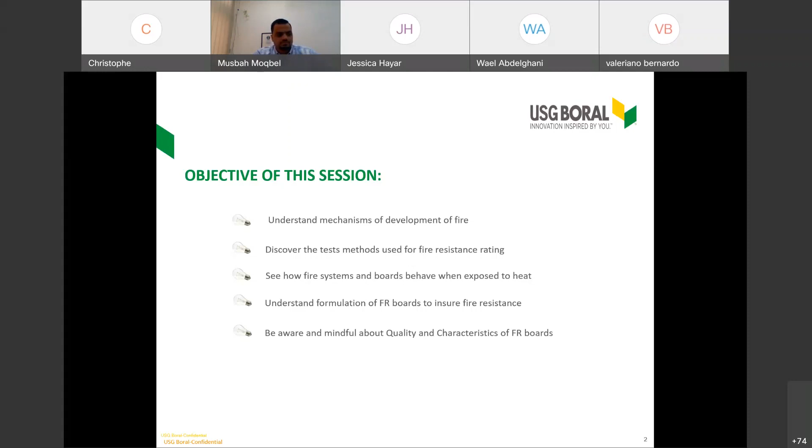There is a specificity of fire-rated systems and fire-rated performance of plasterboards. Ideally, we wish for our customer and for the project that this performance would never be needed. The fire safety and passive fire safety offered by our systems is required in events of disaster or fully developed fire within buildings, which is obviously primarily to be avoided. But in case of such occurrence, the fireboards and systems of USG Boral are here to save lives and to save properties.

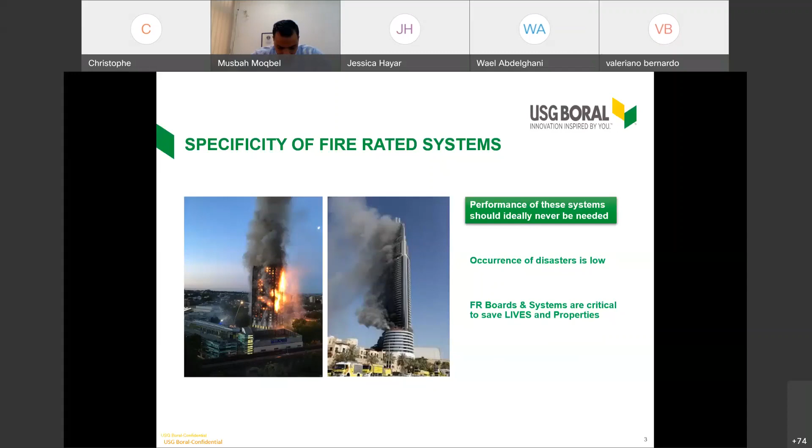We sometimes think that fires in buildings are scattered events, but they happen periodically, a little bit everywhere in the world. You might have seen that one or two days ago there was a big facade and building fire in Milano. So in any regions of the world, including regulated ones, there are sadly events that recall us that fire is not just pure imagination. There are periodic fatalities leading to loss of buildings and loss of exploitations.

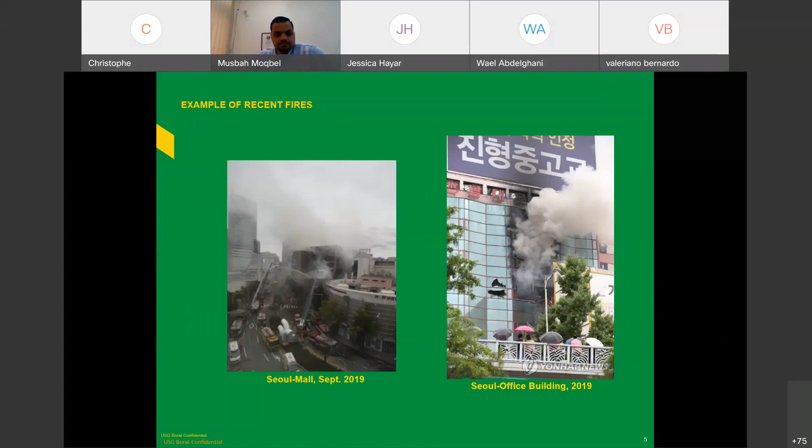Musbah, can you still hear me? Yes. Okay, I had a signal that I was muted. This shows these are not scattered events, this happens. I'm showcasing here some events that occur in Asia as an example, but any of the countries have sadly had the opportunity to demonstrate such fatal events, and in some cases bringing loss of life.

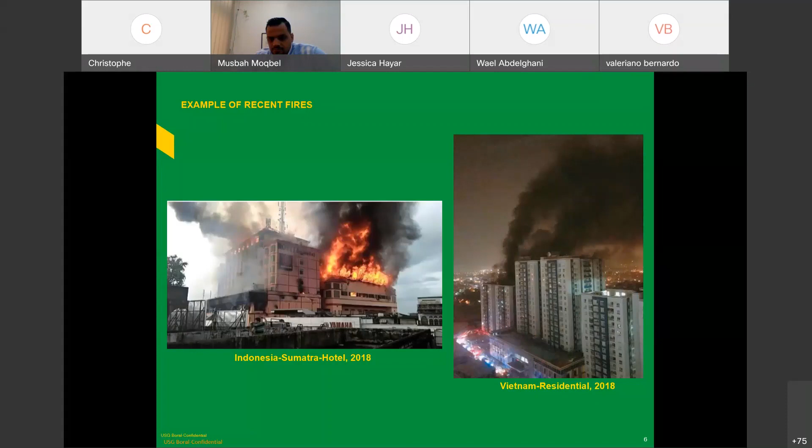As an introduction to the dynamic of fire, and how a fire starts and spreads until becoming a fully developed fire, I will soon show you a brief video to introduce the stages of fire development. But how does it start?

It needs three components: something to burn, a combustible product; some energy; and a comburant, which is oxygen. It usually starts with furniture, mattress, foam, or any combustible product that initiates the fire, which at first, in the first seconds or minutes, can be mastered or extinguished. But there are also design and ventilation conditions which can lead this fire to spread in the room, and in some extreme cases spread out of the room.

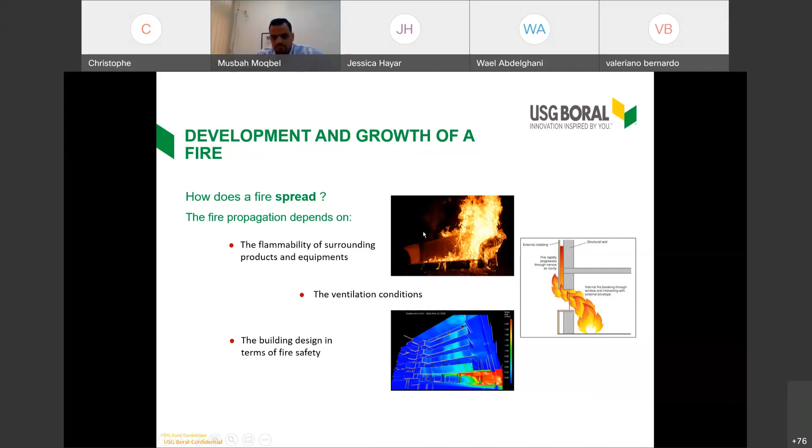With regard to this mechanism and these steps, I'd like to get back to this. In terms of stages of fire development, there is ignition, which at this stage can be mastered through an extinguisher if there's opportunity for a quick reaction. Then, depending on ventilation conditions and presence of more or less combustible products or furniture in the rooms, there is fire growth, which in extreme cases can lead to what is named flashover, or fully developed fire within the rooms, where flames can get out from the original room to spread to another room, adjacent corridors, or in some cases adjacent floors. Let me guide you through a video that will allow you to visualize these stages of fire.

Before this video, I want to mention that between the stage of ignition, the start of flames on a small scale, and the occurrence of a flashover, this time can be extremely small. When I say small, like within 3 to 5 minutes, if the conditions within the room combine combustible products, furniture, and ventilation, the progression from ignition to a fire that cannot be mastered anymore can be very quick.

Let me change the screen and start this video, which I'll comment on. So we are here at the ignition stage. This can be a cigarette or candle in an armchair, in these conditions with a relatively limited fire. The more it goes, the more there is smoke development and fire spread.

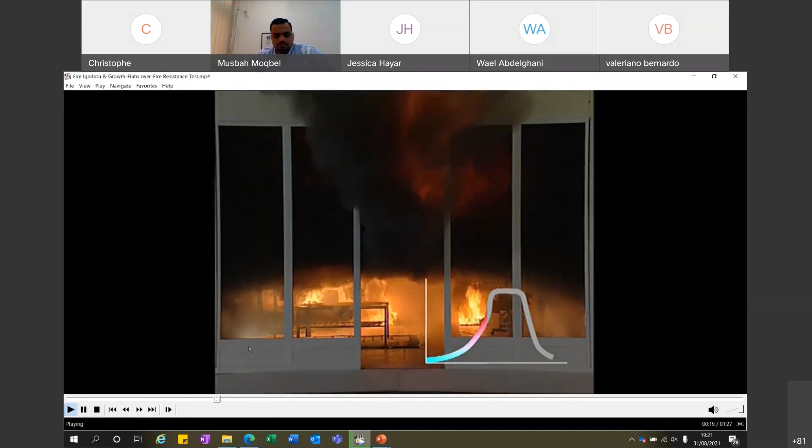Either this is to the adjacent walls, curtains, chairs, or carpets. You see here at this stage there is a continuous temperature increase and hot layers of gases, which can lead up to a flashover.

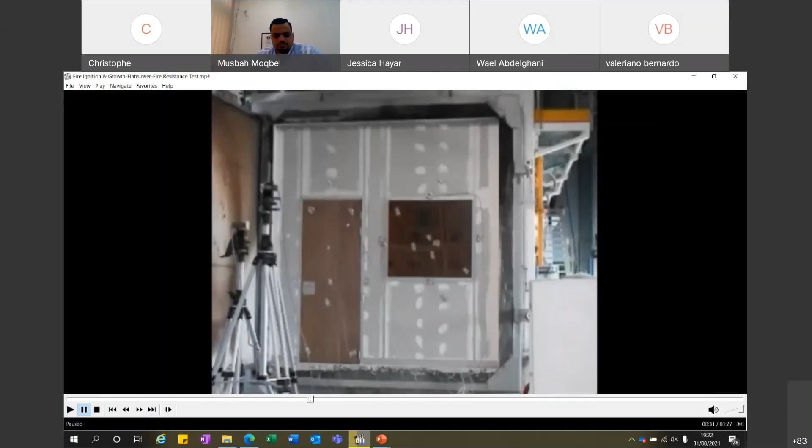This was quite quick, and this was not a real-time video, but in the real case experimental test conducted in laboratory conditions, the time between the start of the fire in the armchair to the flashover was within 5 minutes. So you've seen the flammability driven by the reaction to fire of the armchair. This is easily and quickly flammable, raising the heat release within the room and elevating the temperature quite a lot.

We are going now to visualize a fire resistance test on gypsum board partitions, including a glass window, a fire retardant glass window, and fire doors, just to start to drive through and introduce the next part of the fire resistance test.

So this is here the non-exposed face. Can start, okay. And you can see the burners in the fire following a relatively quick temperature increase, just to simulate and model what is occurring in the case of a fully developed fire in a building.

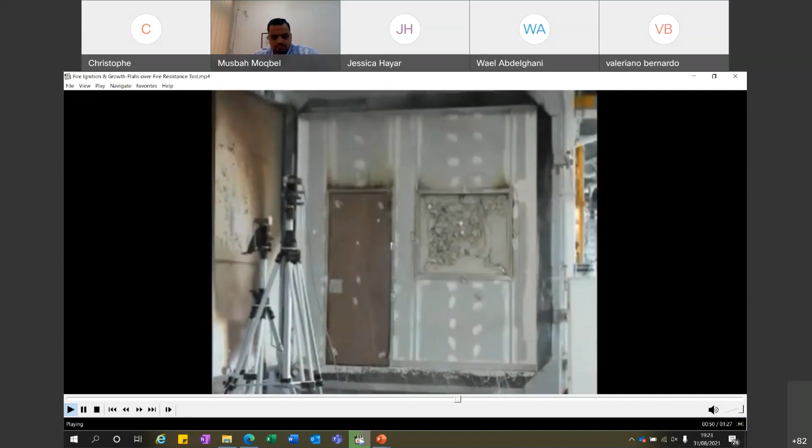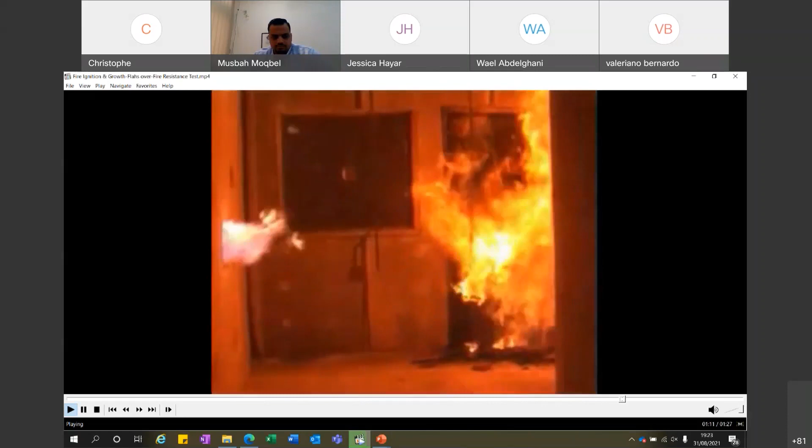You see here the glass window has turned opaque - it's a fire resistance window. This is a view of what is happening in the furnace here. There are burners used to follow a standardized temperature time curve. You see that the fire resistant door, which is wood based, is flaming and bringing some heavy temperature.

This is here the non-exposed face. You see here that the window has collapsed, so there is an obvious loss of integrity with sudden big holes in this case, with flames, which would stop the fire rating in the case of the laboratory.

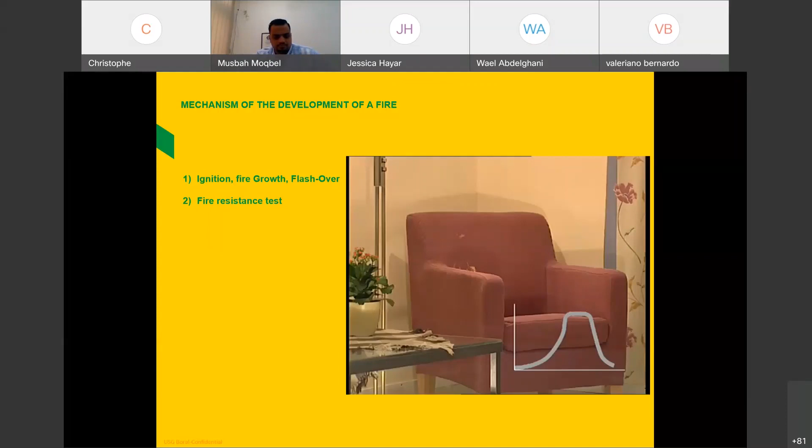So, a visual introduction if I may say, on the three stages of fire: ignition, spread up to flashover, and fully developed fire conditions, which calls for fire resistance systems necessary to contain, delay, and ideally prevent the spread of this fully developed fire to adjacent rooms.

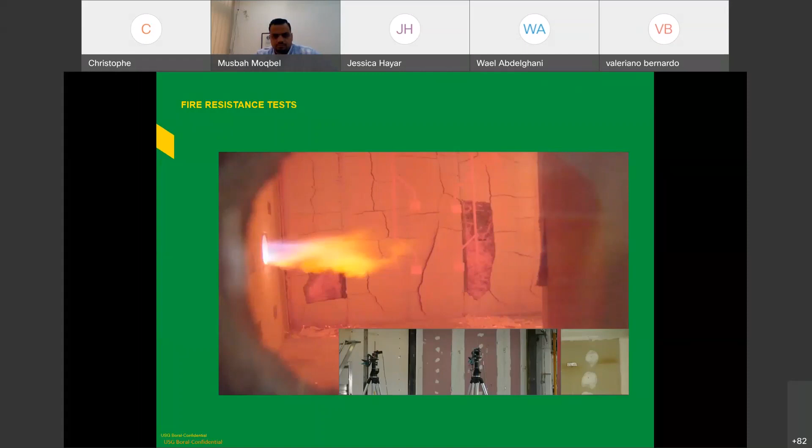Let me guide you now through a bit more detail about the fire resistance test and the way they are performed on our gypsum board systems, or by the way they're applied on any kind of construction system. I spoke of a temperature time curve - there is a worldwide or international standardized curve that you can visualize here.

This is, if I may say, mimicking the elevation of temperature and heat flux that occurs in true life in case of a flashover. You've seen the flashover, those sudden times where the fire in the full room gets covered with flame. At the beginning of every fire resistance test, the speed of temperature increase is very high.

We are reaching around 500 degrees within 5 minutes. We are at more than 800 degrees after 1 hour, close to 1000 degrees at 1 hour 30, and slightly above 1000 degrees after 2 hours. So this curve is the one applied and followed by any fire resistance furnace in the world, used to qualify, assess, and rate the fire rating performance of construction systems.

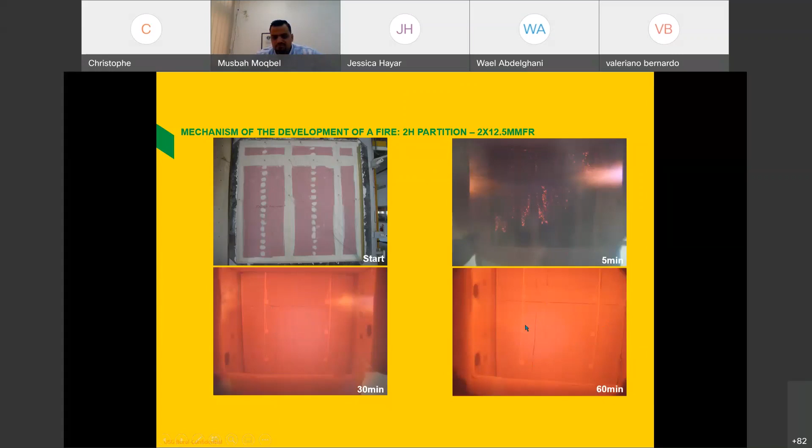And here, this is the end. You can see 2 hours 9 minutes. This is the end of the test and the fire rating due to one criteria, which is the thermal insulation criteria.

You might see some cables with thermocouples set on the non-exposed face of the partition. These sensors assess the elevation of temperature on the non-exposed face of our systems, linked to the criteria of thermal insulation.

The thermal insulation criteria states that once the maximum elevation reaches 180 degrees, a rule set in the standards, the test is completed.

But one interesting thing to observe on this gypsum board system, and any kind of gypsum board system, is that the wall is still in place, almost unchanged, apart from some browning area at screw heads. So at the end of a 2 hour fire rating, the gypsum partition is still here, holding in place and structurally stable, but just missing this criteria of thermal insulation.

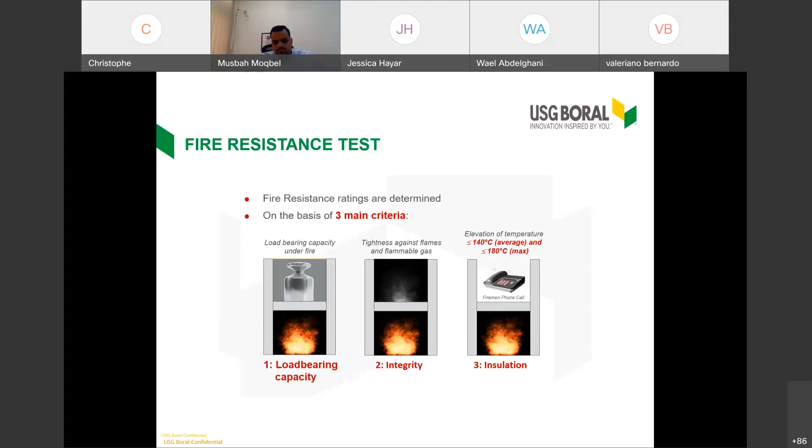A little bit of editorial and vocabulary, if I may say, on the way to report the fire resistance rating. You might be familiar with FRL, for fire resistance level, with 2 to 3 digits, respectively linked to load bearing capacity, integrity, and insulation.

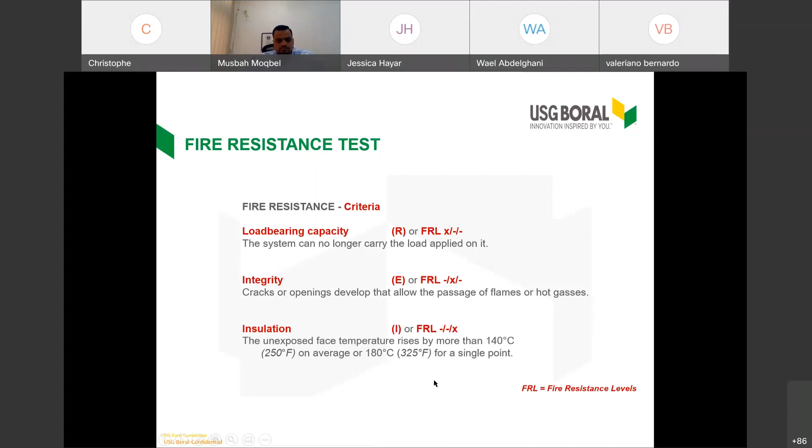Some are also using REI, so I for insulation, R for resistance, and E for, let's say, tightness towards flame and gases. The way it's reported, for instance, a 1 hour load bearing partition would be stated as an REI 60 system, 60 standing for minutes of fire rating, or fire resistance level FRL 60, 60, 60, respectively for load bearing, integrity, and thermal insulation.

Or if we want to state the fire rating combining the 3 criteria, this would be REI 30. The way to write this in the FRL way would be FRL 120, 60, 30. Just a little bit of vocabulary, might be a bit boring, but I think it's good for the audience to be aware of the different ways to assess, write, or report the fire rating performance of a system.

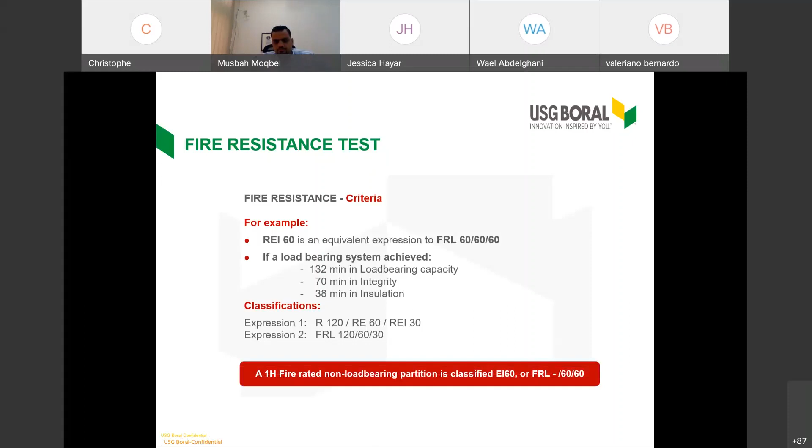And these 2 molecules of water are part of the secret of the very good and high performance of gypsum boards when exposed to heat. Let me tell you a little bit more.

The molecular weight of these 2 molecules of water, H2O, is around 20% of the weight of a board. So this combined water - crystalline water, or combined water, obviously not liquid water within the board, but part of the chemical composition of gypsum - is 20% of the dry weight of the boards, and it requires quite a lot of time and energy to break the bonds of this water molecule.

So this is one of the secrets of the passive fire safety procured by gypsum board - their intrinsic content of combined water, which, depending on the thickness and the type and density of board - I'm speaking here from 12 millimeter regular standard board up to thick and dense fire boards - is anything between the equivalent of 1 liter and 4 liters of water per square meter of plasterboard. It's quite a lot, and as I said, it requires time and energy to dehydrate this board. This is one of the key performance secrets of gypsum boards when exposed to heat.

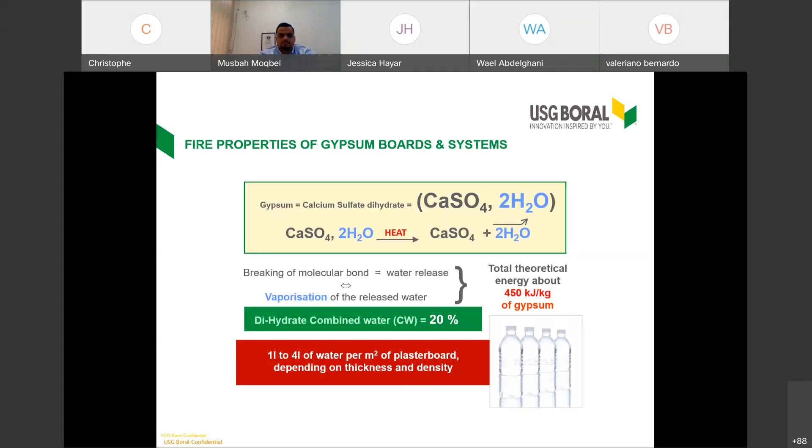The reason is that you remember these temperature-time curves, which are used for any fire resistant test. When you're looking at the fire resistant test and thinking about the thermocouples set on the non-exposed face of the partitions, there is a pretty long vaporization period that we call it.

That is linked just to pure physics phenomenon - as long as the gypsum board is containing water and combined water in its core, the unexposed side of this plasterboard will remain at or around 100 degrees, which is the level of temperature of vaporization of water. So this is the level of energy and temperature that is used and necessary to break the bonds of these water molecules set in the gypsum, and there is a long vaporization plateau or period through which there is a limited elevation of temperature on the non-exposed face.

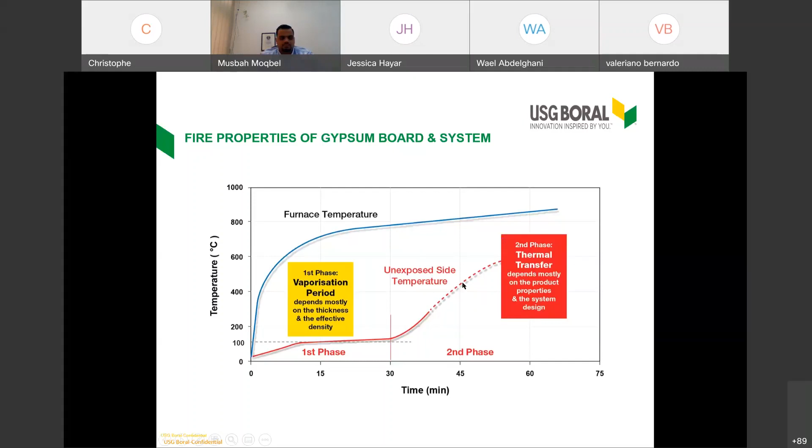What happens after depends on other aspects and recipe of the boards. I mentioned that the facer could be a paper facer. We do have gypsum board whose facers are made of non-woven glass mats - non-combustible glass mat where the cellulose fiber is replaced by glass fibers.

Density is an important criteria. You remember seeing the bottle of water. Fireboards are definitely usually dense boards, and everyone will understand that with density, with weight, it means that through the 20% of combined water in the board, there's a greater quantity of crystalline water set in the boards and longer vaporization periods when exposed to heat.

The fireboards are mechanically reinforced with glass fiber. It's somewhat like composite materials where glass fibers, around half inch, 12-13 millimeters, are set and embedded into the core of the gypsum board, increasing the mechanical integrity and core integrity of the board when exposed to extreme heat.

There's also an additive to counterbalance the shrinkage effect. I mention shrinkage because with 20% combined water, once the board is fully dehydrated it has lost 20% of its weight, which causes micro or macro cracks. These can be delayed or balanced with anti-shrinkage additives.

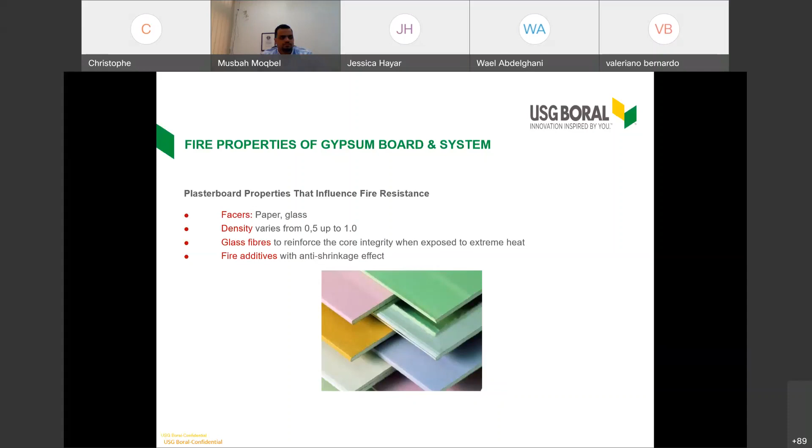So although the boards might look the same, there's a huge difference between a regular board, relatively light with no specific fire additive, and a fireboard, which is much denser and includes a mix of fire additives to substantially increase its behavior when exposed to heat.

Getting back to this curve of temperature, this is what would occur on the non-exposed face of a wall. Quickly after the vaporization period, regular boards will have relatively quick failures, whereas fireboards, with the addition of glass fiber and anti-shrinkage additive, combined with higher density and higher content of combined water and fire additive, will have much longer integrity when exposed to heat.

In addition, I mentioned that the design of systems or the type of facer can lead to a more or less long fire resistant time. I will get into the details of some typical gypsum-based systems to drive you through half an hour, 1 hour, 2 hours - it can go longer using gypsum board.

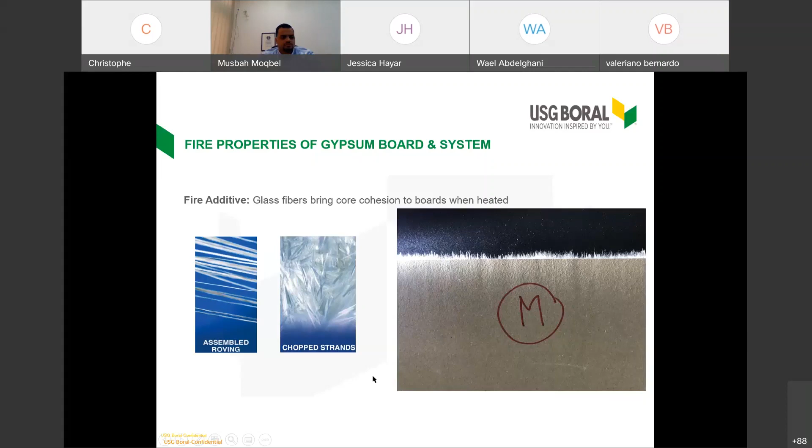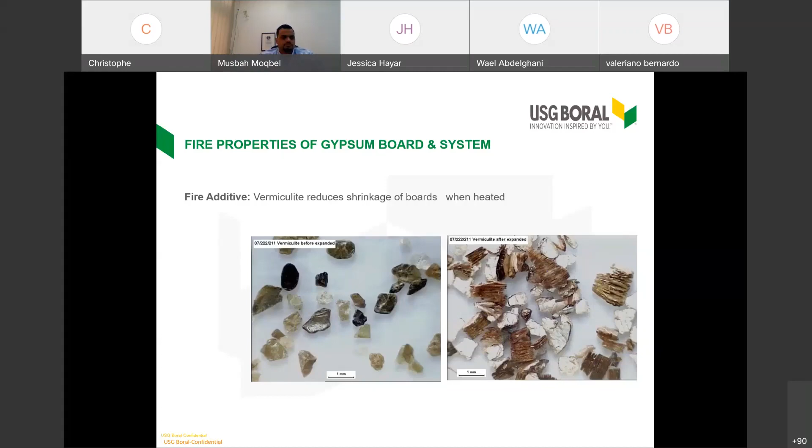Another set of additives counteracts or counterbalances the shrinkage. A typical one is vermiculite - small mineral flakes which, when exposed to heat around 300-400 degrees C, expand. You see here raw vermiculite and vermiculite that has been exposed to heat. It fills the gap of the micro cracks, delaying these cracks and the effect of shrinkage. So I wanted to spend a little time unveiling the formulation secret of gypsum boards.

Just mentioning that Musbah mentioned the plants and operations we had in the Middle East, and we do have them in almost all across the world. The fire additive and the recipe are qualified and specified by our research and development team.

The formulation within the plants - this is the role of our plants to ensure consistency and respect of the recipe, whether dry weight, type, and content of additive. Those fireboards are heavier products, but more than others, are subjected to continuous quality control, about shrinkage and core cohesion.

You see here a small scale test where a fireboard is subjected to 1000 degree burners on both sides to make sure the core integrity is ensured during 1 hour.

More importantly, and maybe very important for the attendees here, the fire systems are tested - fire resistant tests, which I've briefly described to you. We have a set of third-party full-scale fire tests to assess the fire rating of our systems, either partitions or walls, and this is periodically renewed.

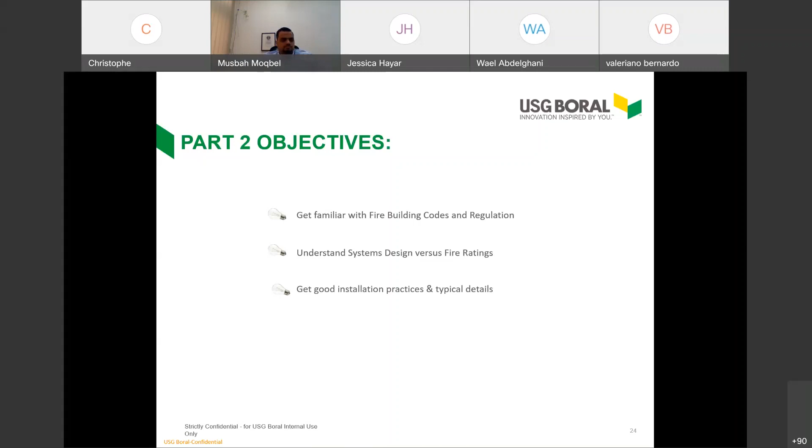I wanted to spend a bit of time with you because it's important to ensure fire safety - I could make the same remark for acoustical comfort. It's good to get nice, high performing components and high performance plasterboard, but it's also quite key to apply good installation practice to make sure the passive fire safety of our systems or acoustical performance is sustained. Due to being exposed, you will see there are some key details we need to keep in mind.

So in terms of fire engineering, I went through this already, but you see here a partition at the end of a fire test, having been exposed to this time-temperature curve.

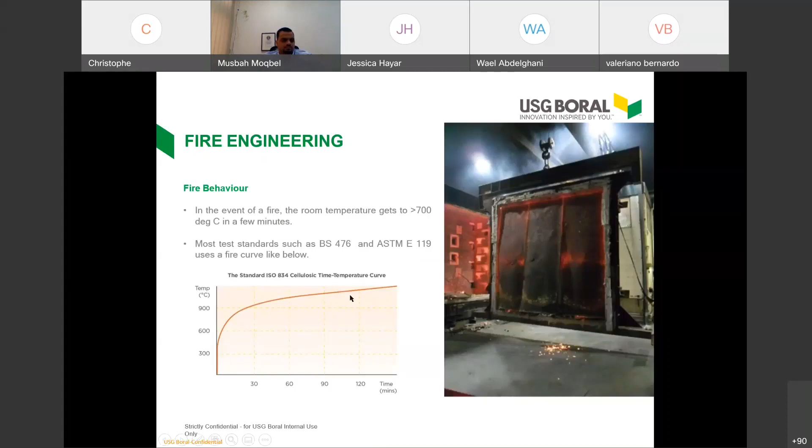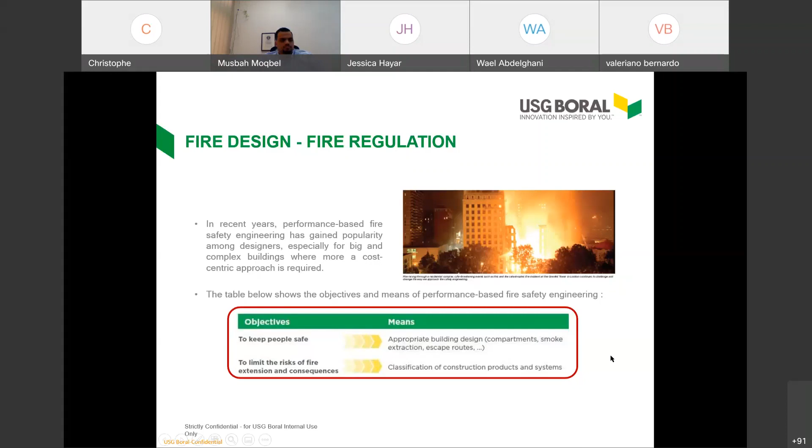So save the people and keep the goods or the buildings as much as possible in their integrity. In terms of fire design and fire regulation, saving lives and keeping people safe means ensuring that within the building, depending on its type, occupancy, and number of floors, in case of a fully developed fire occurring in any of these rooms, people can be warned in advance and can safely escape through practicable safe exits that are linked.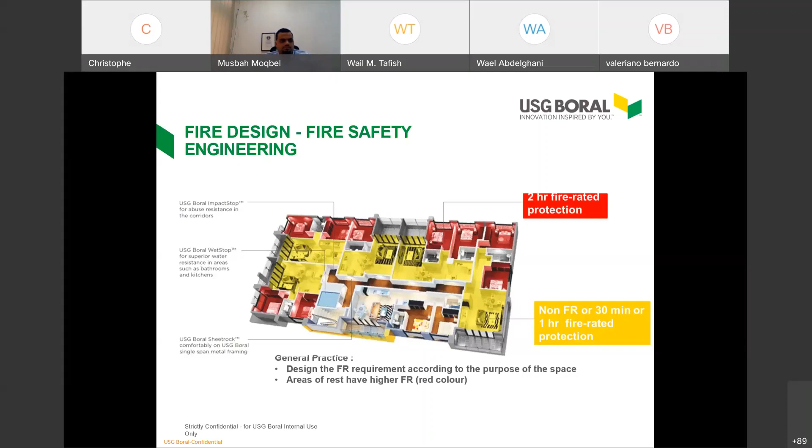Let me show another aspect of fire design and fire safety engineering: making sure that the room compartmentation and design per the building code is set such that the room-to-room walls or room-to-corridor walls are rated at either half an hour, 1 hour, or 2 hours, depending on the occupancy or purpose of the building. For instance, in a hotel or hospital, where people are here to sleep or rest, usually room-to-room or room-to-corridor fire safety requirements in building codes are higher than in other types of buildings.

In terms of fire compartmentation, this is here to prevent or delay the spread of fire from one room to another.

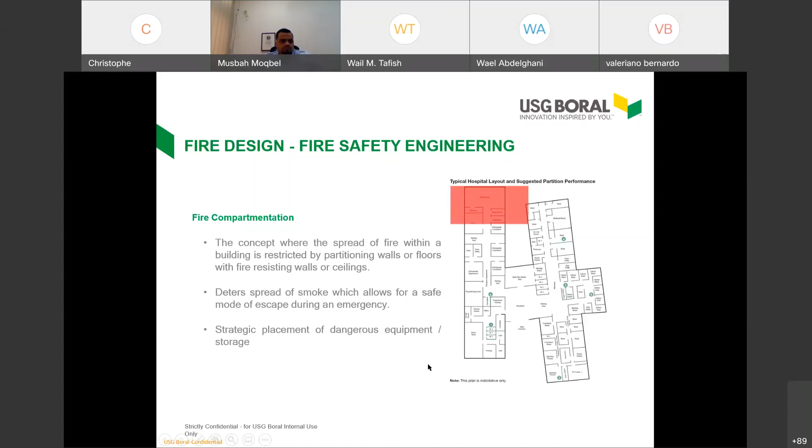Another aspect in a building is the strategic placement of dangerous equipment. When I say dangerous equipment, I mean items with a high heat release rate, or combustibles, or flammability -- these get placed in storage areas which are highly protected by 2, 3, to 4 hour walls, with compartmentation across the floors and between floors to leave a practicable escape route in case of fire development. Typical examples of this could be hotels, but also hospitals.

I'm stating this because a 1 hour fire rating from room to room would be a minimum, with 2 hours between room and corridor, or 2 hours for the corridor walls. In very high or very large buildings, there is usually an additional level of compartmentation, stating that it can be every 6 rooms or every 20 to 25 meters. This additional compartmentation allows containment of the spread of a fire.

The logic here is: in case of a fire occurring in one of these rooms and sadly extending to other rooms, there would be extra delay to confine and constrain the fire in this area until the fire brigade can come and be active.

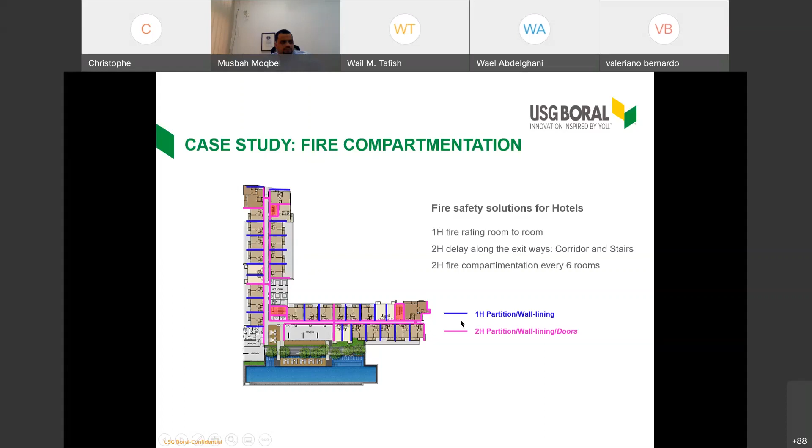I hope this clarifies a little bit the logic of fire building codes and fire system design within buildings. For very specific shaped towers or high-rise buildings, fire engineers and designers include some refuge floors -- empty floors or non-operational floors on a daily basis, which offer usually very high resistance to fire. When I say very high, it can be 4 to 6 hours or more, purely bare and thick concrete. In case people would be trapped and not able to reach the ground floor, they can at least be kept safe long enough and away from a fully developed fire that could occur in one of the sections of the building.

No need to tell you that the Middle East is a great place for high-rise and majestic high-rise buildings. These refuge areas, or escape floors if I may say, are part of the design of the building, despite you might not be able to see them because they're behind glass with windows -- but this is usually part of the design. I'm speaking here of high-rise towers, so 150 meters or more.

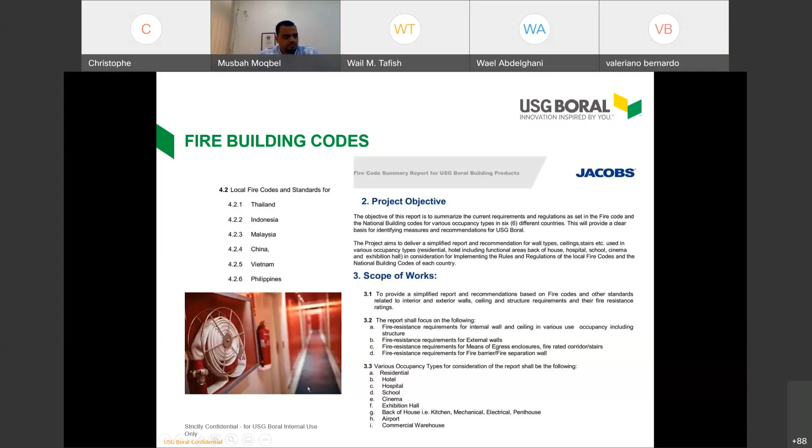This is what brings the various civil defense or fire brigade authorities to set rules in terms of compartmentation and fire rating of systems, either walls or ceilings, with the objective of fire safety in buildings: save life, leave enough time for people to escape from the buildings, and confine or restrain the development of fully developed fires so that the fire brigade has time to stop the fire before the building is fully destroyed. So we went through this.

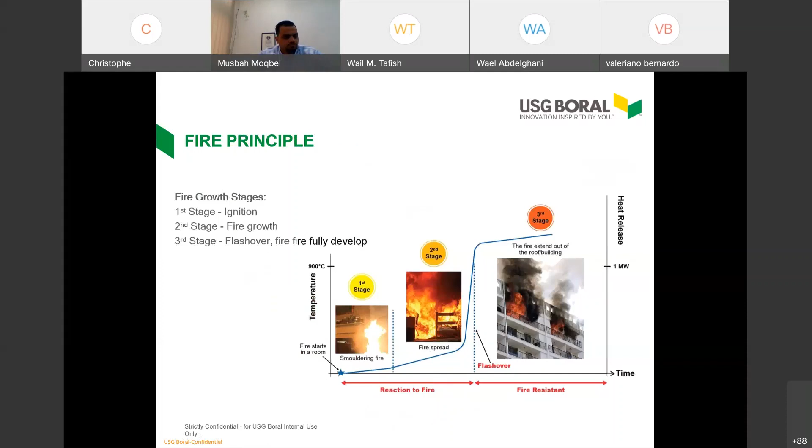I was willing to quickly illustrate reaction to fire - the assessment of the flammability or non-combustibility of a product. So we are speaking here of reaction to fire test. This is usually a relatively small scale test to which our gypsum board has been submitted. But despite the presence of either paper facer or non-woven glass mat, all or any gypsum board falls into the non-combustible family of products.

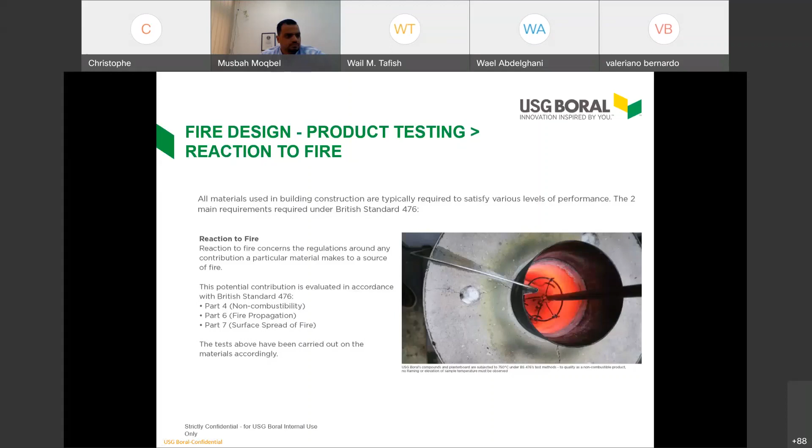It's purely mineral, and remember as well that the 20% of dry weight of combined water set in the gypsum boards makes it impossible to ignite a gypsum board.

This is to illustrate, or refresh, the criteria of fire resistance test. One is structural adequacy, making sure the system or shear wall will stay in place. Integrity, making sure that tightness toward hot gases or flames is ensured during the fire rating time. And thermal insulation - remember the criteria, 180 degrees C as maximum elevation of temperature on the non-exposed face, or 140, whereas in a typical fully developed fire the rise of temperature can reach 1000 degrees.

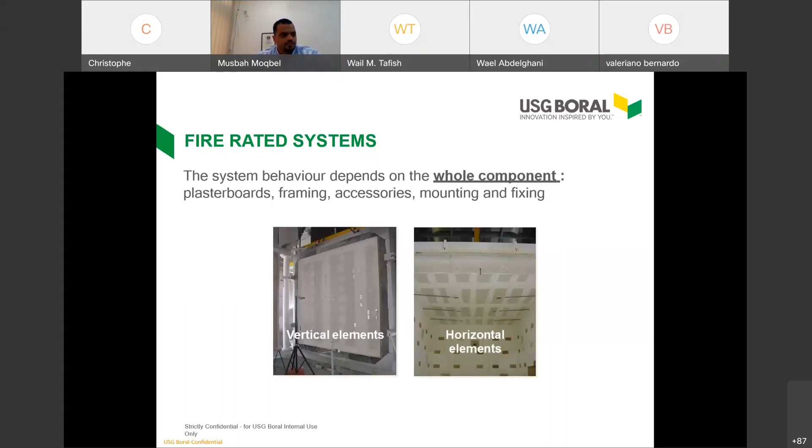Fire resistant tests and full-scale tests apply to either vertical or horizontal elements - walls, partitions, ceilings, or floor ceilings - and there is bespoke fire testing methodology for this.

On the non-exposed face, as illustrated earlier in my presentation of a fire resistant test, you can see all the cables - these white spots are thermocouples set on the non-exposed face of the partition to assess the criteria of thermal insulation.

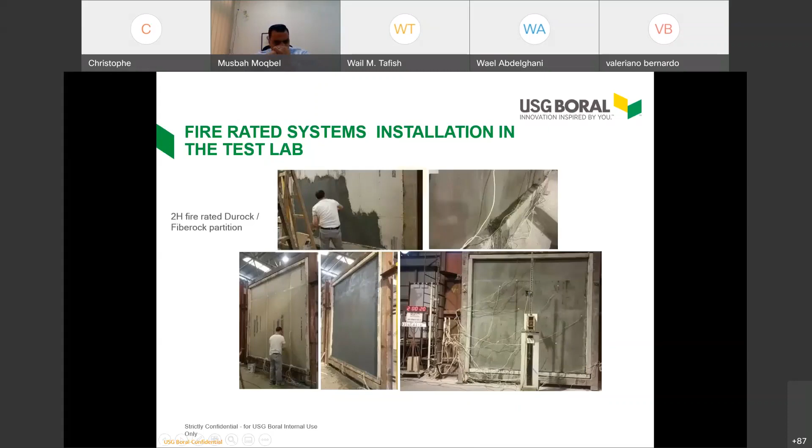It's not easy to read, but you can see 2 hours here. At the end of the 2-hour test, the non-exposed face almost looks normal, but there has been at least one point - or we are close to reaching the time - where one of the thermocouples will reach a temperature of 180 or more, which will be the end of the fire rating time of this system.

So, gypsum board and gypsum board systems with regard to fire ratings - I mentioned that we do have some regular boards which provide some fire resistance by themselves. Single layer 12.5 millimeter regular boards on framing can provide up to 30 minutes. This could typically be an office-to-office fire rating.

Double layer 12.5 millimeter regular board - so without any additive and relatively low density - could be used to reach 1 hour. But in fact these fire rating times can be reached with a single layer 15 millimeter fireboard. Remember, fireboards are denser with a mix of fire additive.

With or without rock wool - we usually classify our systems with a free cavity with no wool, which allows extending the fire rating to systems with wool - for 2-hour partitions. If you heard me clearly, 2 layers of 12.5 fireboards on the framing ensure a 2-hour fire rating.

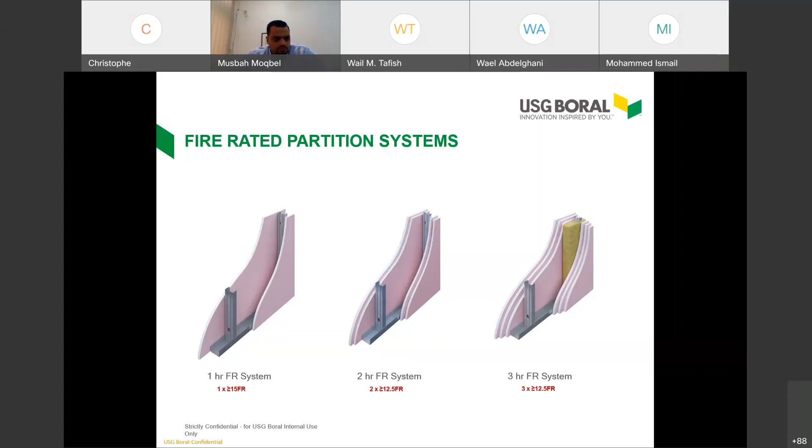We do have similar systems for exterior walls or glass walls, combining a regular fireboard with a non-woven glass mat board that can be selected for wet area rooms, for tile backer.

We do have wall linings, just boards on a single side, where 2 layers of 15.9 FR would ensure a 1-hour fire rating. And we do have a shaft wall, typically for lift shaft or stair shaft, where the combination of a thick shaft board, 25 millimeters set in a specific CH stud, and 2 layers of 15 or thicker boards ensures 2 hours.

I mentioned 2 hours because typically the lift shaft has to be rated 2 hours. Sometimes 1 hour if the building is not too tall, but 2 hours is more common.

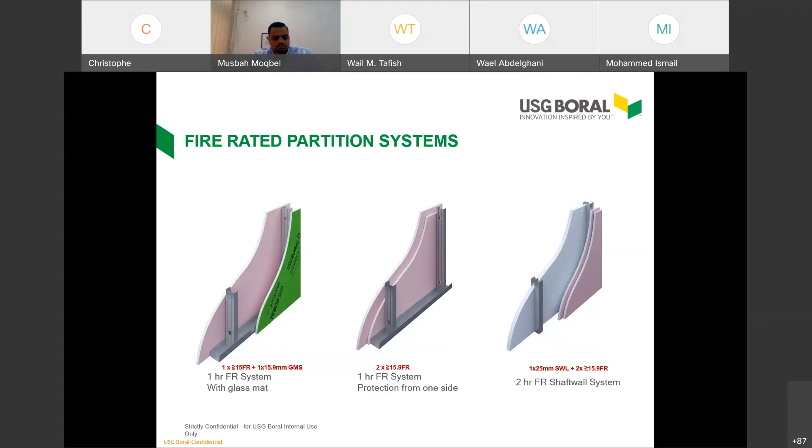I've briefly covered here wall systems. Same mechanisms apply for ceilings, where we have either 1-hour fire rated ceilings or a double deck, 2 times 2 layers of 15 millimeter, for some projects which require 2 hours protection.

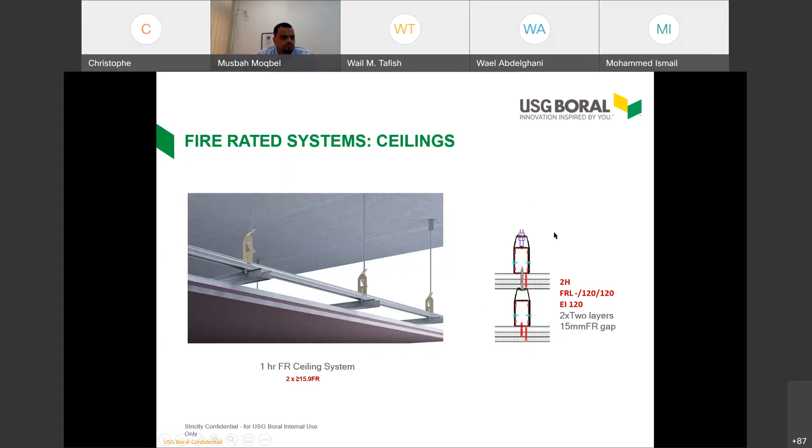It's usually typical in airport or large projects where between the concrete slab and the back of the ceilings there's a lot of potential combustible product through electrical cable or duct, or combustible process set into the plenum between the concrete slab and the ceilings, with a requirement of 2 hours protection brought by the ceiling itself, excluding the concrete slab, just to provide heat and fire protection to any combustible cable or other components that could be set in the plenum.

One specific segment is structural steel column and beam encasement, where the fire rating here is to ensure the load-bearing capability of steel components. You can see here I or H beam protected by single or double layer of gypsum board. Depending on the section of the steel or size of the beam, the use of gypsum boards can allow us to ensure the

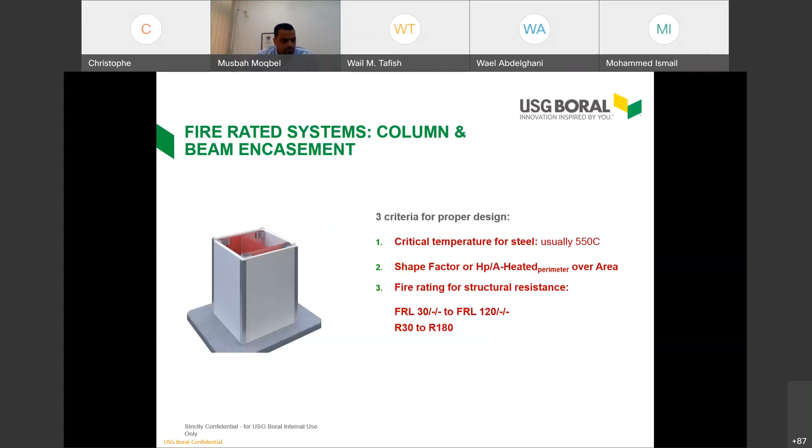structural stability from at minimum 30 minutes up to 3 hours in some cases. I will not spend too much time on this, but the fire building codes link this structural stability to a critical temperature of usually 500 or 550 degrees C. It depends on what is named shape factors - size and dimension, linear weight of the beams.

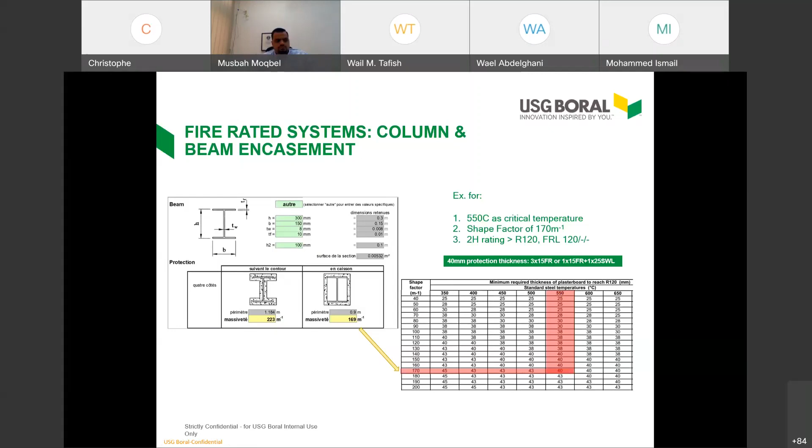We do have tables which, from the desired fire rating - this is a matrix here for 2 hours - and the shape factors and size, allow us to provide the protection thickness required using gypsum board to ensure the structural stability of this system.

I'd like to spend the rest of this presentation providing you some installation practice and typical details. You will see here installation practice in a laboratory environment, but this is applied in true life. So this is important for architects, supervisors, or inspectors to keep in mind.

I spoke a lot about fire safety. This is the topic of tonight. The prerequisite for any of our systems is to get, at ambient temperature, a structurally well-designed system, either wall or ceiling, because the stud deformation increases the stress on the boards, and

it could accelerate the fall of boards. So it's important that the USG Boral team keep in mind that the fire rating is, prior to the fire rating, linked to a proper structural design and selection of steel stud for wall or furring channel for ceiling.

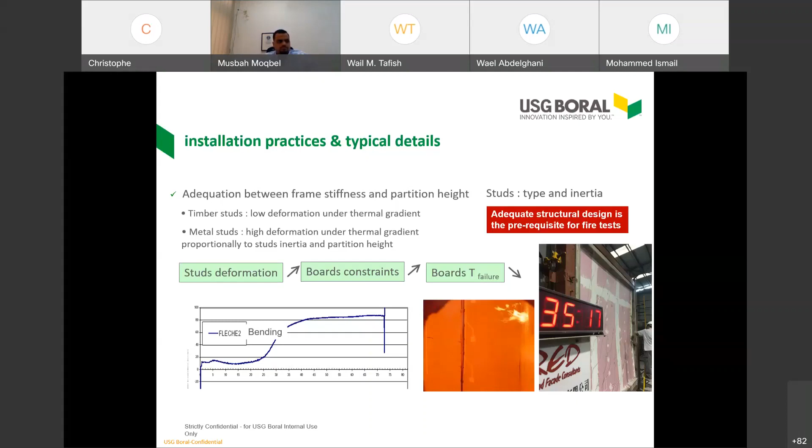I was illustrating partitions. This is the same here for ceilings. The key message: getting an adequate structural design is a prerequisite for the fire test. The rule is simple - just to make sure that in terms of ambient temperature, we have mechanical designs in terms of serviceability and deflections that are properly designed before being covered or layered with gypsum board.

One aspect here for the system is that when exposed, the steel stud during a test, or when exposed, sadly, to a fully exposed fire in a building, are subjected to high temperature. It can be up to 600, 700 degrees, which causes steel expansion. So it's important to leave a free gap between the steel stud and the top track that is used to fit the partition, so the tracks are set at the perimeter of the partitions.

Studs are usually set on the bottom track, and it's important to leave an expansion or thermal expansion gap at the top of the stud and the track, avoiding any mechanical fixing point or screw between the top track and the stud. It has to be free.

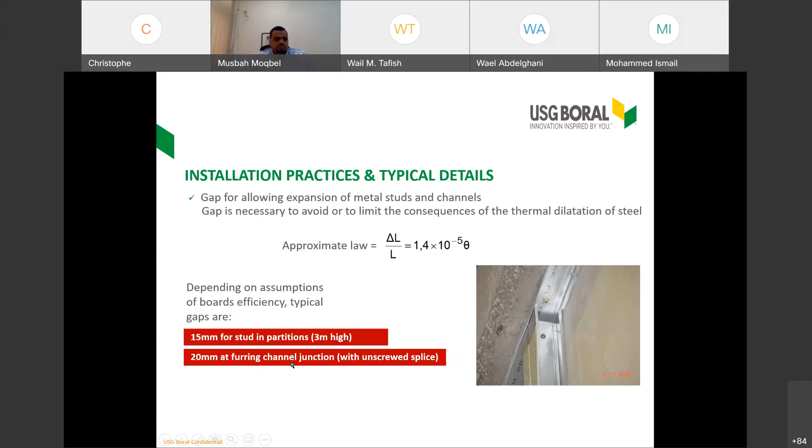I can ensure the audience that the mechanical and structural design is perfectly ensured, but for fire safety behavior, we need free thermal expansion in case of fire. This applies to walls with 15 millimeters every 3 meters of system, or to the furring channel in the case of ceilings.

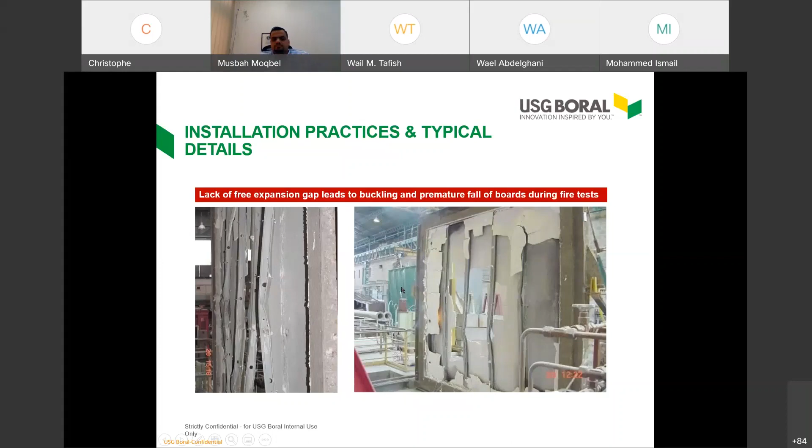If you don't apply this, if there's no expansion gap - and this was shown in a bespoke test - if you set the studs in contact with the top track, you increase the risk of buckling or twisting of the stud, which leads to premature fall of boards during a fire test. This could, and for sure would, lead to loss of fire rating, and this can be a substantial loss.

I was willing to zoom in a bit on this. The screw as well - it's better to get a screw as close as possible to the stud or the furring channel flange rather than the board joint or board edge.

The reason is that shrinkage of boards is usually linked to hairline cracks or cracks at the screw heads, and this is where there's a loss of mechanical fixings that starts potential fall of board. So it's better to get the screw as far as possible from the edge, typically and ideally 10, or even better 15 millimeters from the board edge, rather than too narrow.

This is typical installation detail which our installers or contractors are trained and familiar with. In case of multi-layer systems, make sure that the edges of boards of the inner and outer layers are staggered, to avoid a straight line or risk of thermal transfer from edge to edge. It's also part of usual gypsum board installation rules.

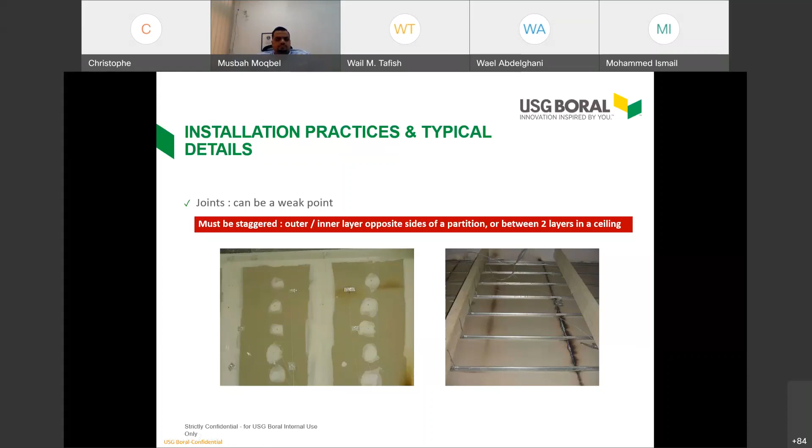I mentioned that most of our fire resistance tests were made without mineral wool. The mineral wool is usually helping or bringing benefits to the fire system. This is why USG Boral usually drives tests with a free cavity, and this can be extended to similar tests with wool - the wool being primarily for acoustics and possibly also for fire.

Between the two big families of mineral wool - glass wool and stone or rock wool - rock wool is the one providing benefits to our fire systems because its melting point is very high. It's basalt made, so it's about the melting point of steel, so it will stay. For the audience, the key takeaway is that a fire test proceeding on a free cavity system can be extended to a similar system with mineral wool.

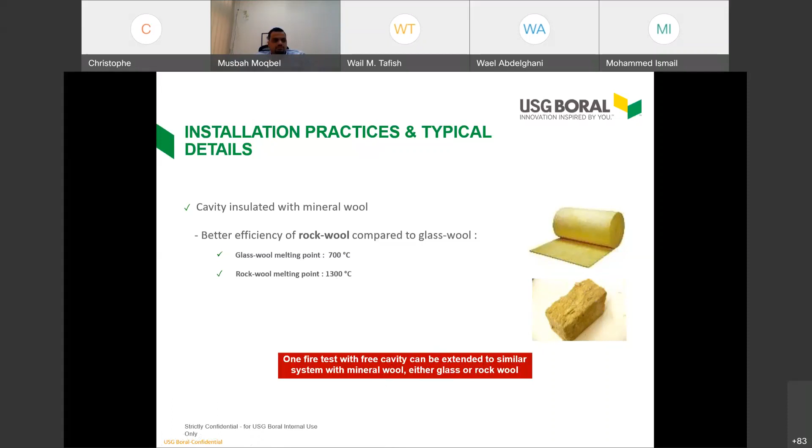Close to the end, there's a typical question about whether a fire resistance test is representative of reality, and whether there are real examples. First, as I mentioned, all fire resistance tests are standardized and performed following similar rules worldwide. All building codes for fire rating refer to this type of test - whether ASTM, US-based, BS British Standard, ISO, or others - all referring to similar temperature-time curves and following the same rules of fire rating.

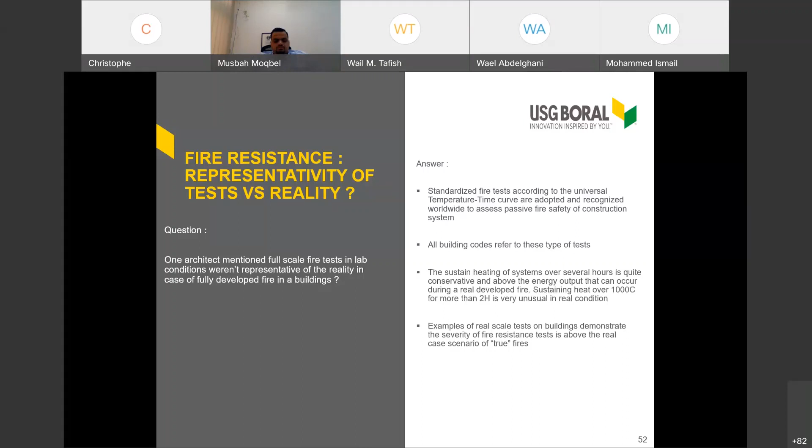There are few, but there are examples of real scale fire tests, and USG Boral got the opportunity to be involved in one. It was more than a full or large scale test - it was a real scale warehouse filled with more than 300 tons of wood, and we got the opportunity to put in a relatively high rise partition, 12 meters high. I'd like to show you a short video of this.

It was, if I may say, like an open air gigantic fire resistant test with 300 tons of wood set in the warehouse, some aerated concrete block, and a 6 meter by 12 meter high gypsum board partition. As you'll see later, it was a single frame with no wool in the cavity.

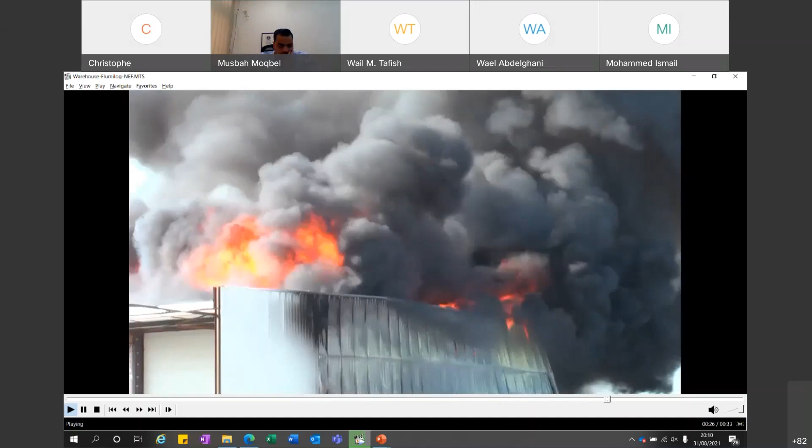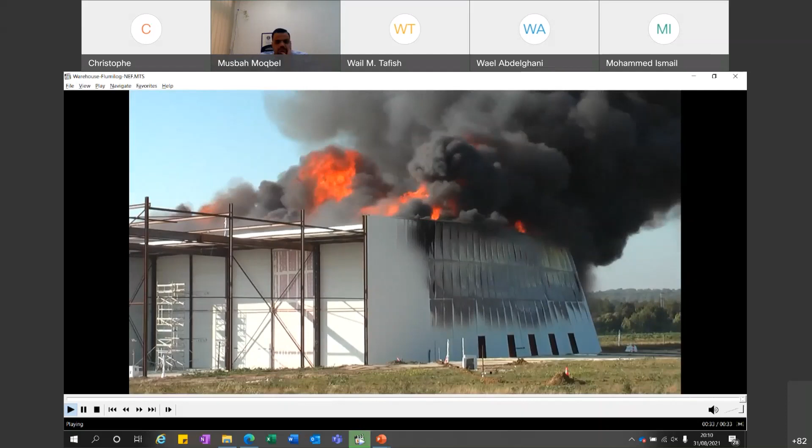You can see that the fire has been gigantic, with temperature levels close to 1000 degrees sustained during 2 hours of time. I hope the video was able to be seen by all the attendees. Yes, okay, that's good.

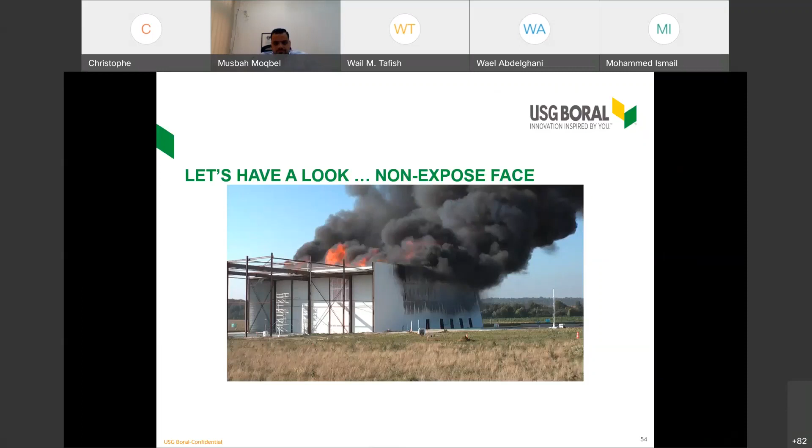It's a bit of an extreme condition, but it was a unique kind of occasion to test our system in a real case.

On the exposed face, and it was kind of a surprise after this, the outer layer of gypsum board was still in place. As you can see, a bit of joint opening. It's hard to see, but a bit of cracks here and there, but the boards have not fallen.

Getting back to some of the installation details I gave you, I'm getting back on this. So it was, sorry, I said 12, it was only, if I may say, 11 meter high wall. It was back-to-back stud, with 400 millimeter distance, to ensure the structural stability.

You remember that the prerequisite of any good fire-rated system is to make sure that structurally the system is well designed. You can see this in the USG Boral manuals, or you can talk with USG Boral mechanicals, or if needed with R&D folks.

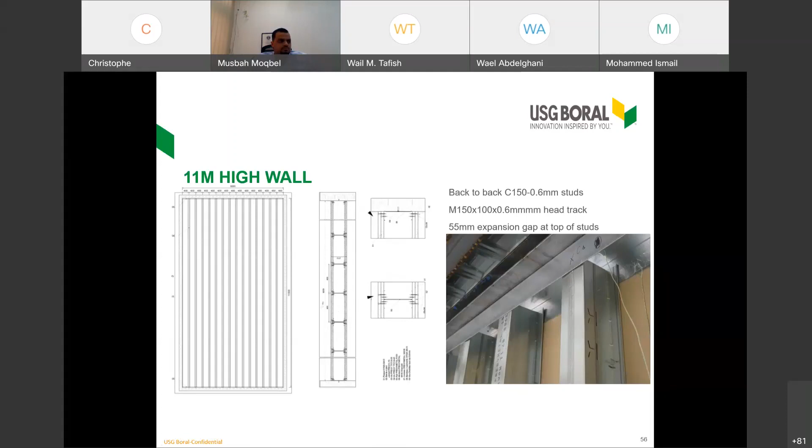You see here the top track has a pretty deep flange of 100 millimeter, and we did apply the rule of 5 millimeter per meter of partition of free gap, so that there was a 55 millimeter thermal expansion allowance, which I believe is one of the points that explains why there were relatively few deflections and no fall of fireboards on the exposed sides of this gigantic fire.

Towards architects or developers, I was willing to finish this presentation on safety in buildings in case of fire with some design considerations on curved walls. Do we have any experience of fire rating on curved walls?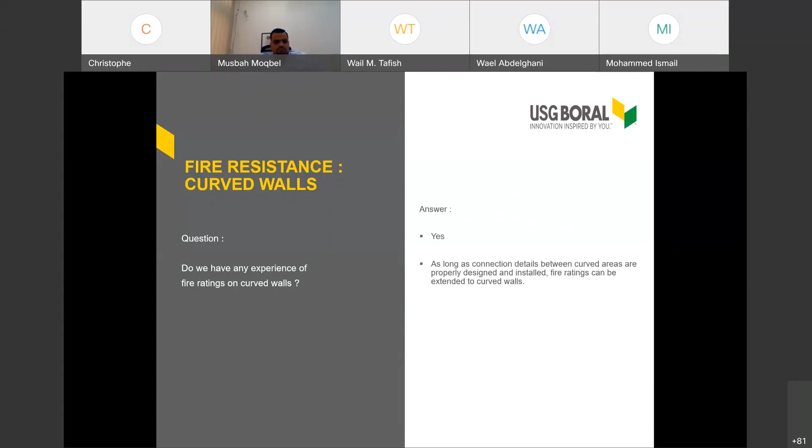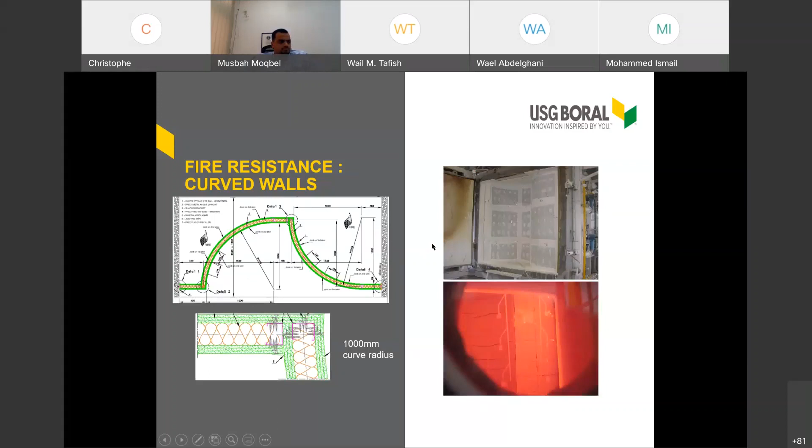The answer is yes, and that's one of the capabilities that we do have with gypsum boards, the regular boards or fire boards. They can be installed with a curve radius. You see here a partition, a bit of an extreme partition with two curves that has been tested. We have two other smaller and narrower curve radius partitions.

So they allow versatility in design, in the 3D design of curved designs, adding to the aesthetics and the design, on top of the fire safety and passive fire safety offered by the gypsum boards.

I wish to thank the audience for listening to me to the end. I think, Musbah, I got more or less a 1 hour talk, or maybe 55 minutes. I don't know if it was far too much, but hopefully enough for the attendees to get a discovery, or maybe a refresh, on fire safety, building codes, and revealing a little bit of the secrets of gypsum board based systems. Thank you.

Honestly, it felt like 5 minutes only. It was very smooth. Okay, well, thank you very much. We are hosting this for the first time. Hopefully it wouldn't be the last. Hopefully we will see you more frequently on our technical webinars, Christophe.

Sure, again, there are some other R&D folks that will be, I'm sure, happy to speak, either on acoustical comfort, structural designs, or fire safety in a specific segment. I'll be happy to support here, and I'm eager to interact or hear any questions, and hopefully I'll do my best to answer any type of question.

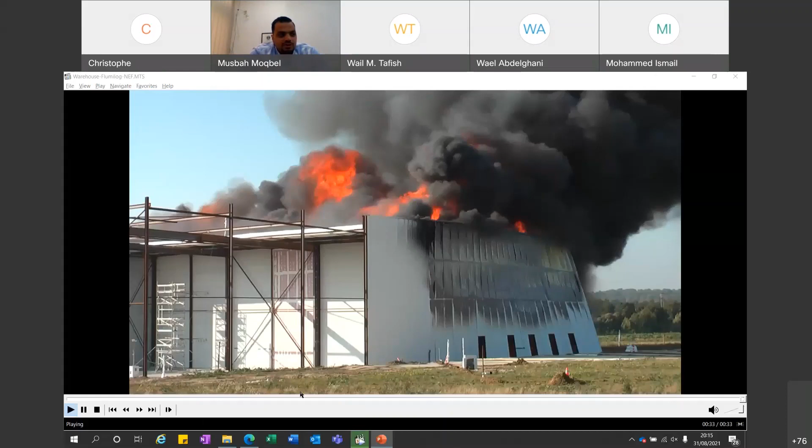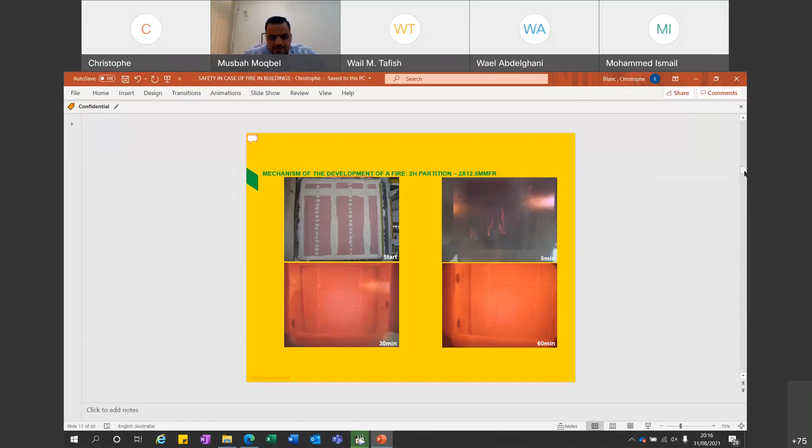That's a good question. This was slide 11. You say, Musbah, right? Yes, maybe this one. Yes, this one exactly.

That's a good question. Actually, the ASTM is not exactly following the same equations, but it's close to it in terms of fire dynamics. The difference between ASTM and some other standards is more on the type of furnace thermocouple used to pilot the burners, and the internal pressure existing within the furnace. It's a little bit technical, so I won't touch on this testing methodology aspect. But if I were to describe the ASTM curve over 1 hour, it tends to be at the start a little higher than the ISO curve, then relatively equal at 1 hour, and slightly below afterward.

What drives me to say it's almost the same is that the differences between the ASTM temperature-time curve and the ISO 834 equations, from what I recollect, is in the plus or minus 50 degree range across this fire rating. Plus minus 50 is quite a gap. But considering the nominal level of temperature, let's say from 10 minutes, it's relatively the same at the end in terms of heat and energy output at 1 hour and equal at 2 hours. The dynamic would be slightly quicker at the start and slightly slower at the end, but in terms of energy output, if we consider the surface below this temperature-time curve, ASTM and ISO would be the same.

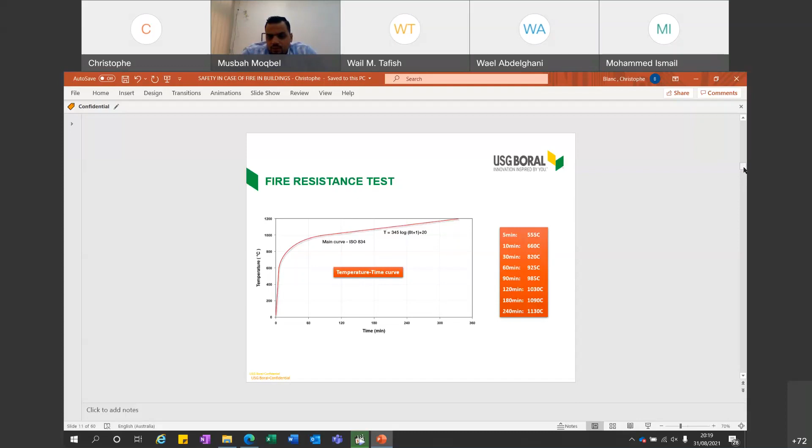Thank you, Christophe, for this comprehensive answer. Another question, following the American standard: what is the difference between Type X and Type C? That's a good question, I see we are having some experts here.

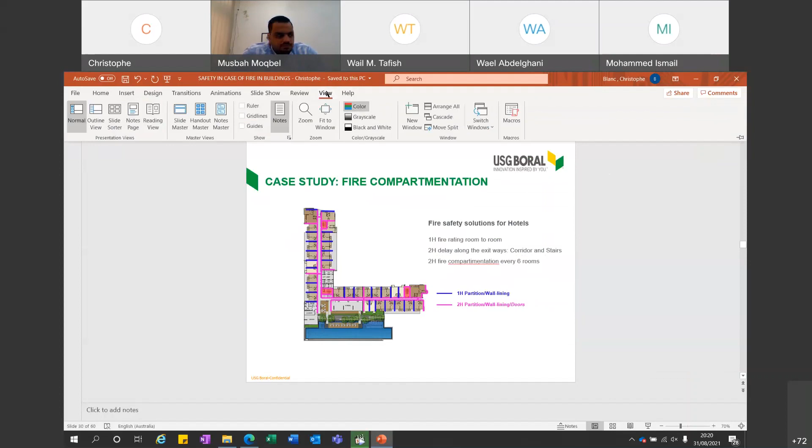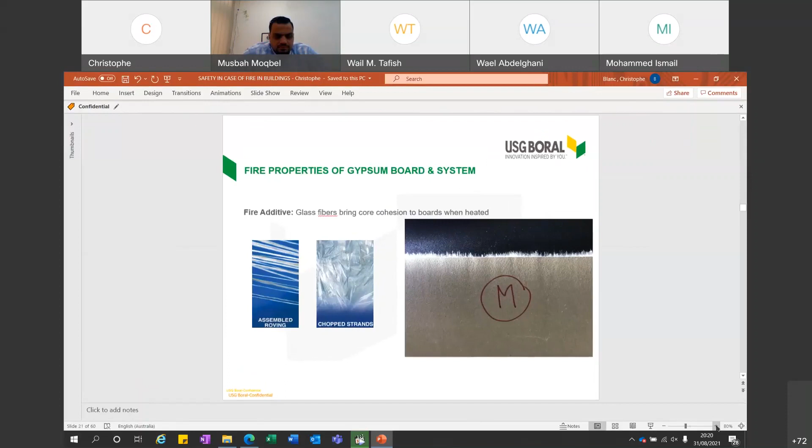Type X and Type C refer to a type of formulation or recipe. Let me get back to a plan. Type X is usually a 5/8 or 15.9 millimeter board formulated with glass fiber only. Usual portfolios in the Middle East have UL Type X and Type C boards, but we do have systems based on half-inch or 12.5, 13 millimeter boards. Type X board is 15.9 millimeters, a little bit thicker and denser, with more combined water and glass fiber, and it's a typical board used for vertical systems, wall systems.

The Type C board would be relatively close to what's described as the pink fire boards. It's a board with a mix of fire additives: one is glass fiber, same as Type X but with higher content, and the other is vermiculite. So it's a combination of two fire additives.

I'm not sure it's entirely correct, but a good way to remember the difference: Type C boards, like per UL, are more dedicated to ceiling systems, horizontal systems, where the gravity effect calls for a better designed or formulated product. So Type X is a little bit lighter than Type C, with glass fiber only, if I may say. Type C is a little bit denser, a combination of glass fiber and vermiculite. Both boards relate to tens and tens of UL designs, providing a wide range of fire ratings from half an hour up to 4 hours, for walls, ceilings, or structural protections.

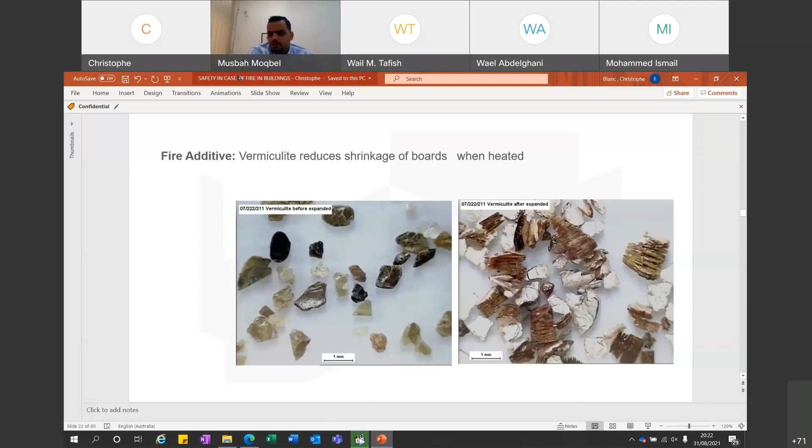Yes, really, it's very comprehensive, very specific. For the suspended ceiling, if you allow me to ask another question: which standard is followed for the fire test of suspended ceilings? Is it ASTM E119 or BS 1364?

Good question again. Both, and it depends here on your regulations or the building codes.

The ASTM set of standards are quite popular in the Middle East and are also accepted in a few countries in Asia, such as Singapore. The most popular or still popular system is BS 476, but the EN 1364, or BS EN 1364, would be the standard applied in Europe for the European market. That is covering and superseding the BS standard, and is also more and more introduced in the building codes.

But either ASTM E119 or the EN are two different types of standards, leading to relatively the same testing methodology. When I say relatively, we've shared that the ASTM temperature time curves and the EN relating to the ISO differ a little bit. The type of furnace thermocouple was a bit different, and the pressure regime a bit different, but that's going a bit too far into the technique of this.

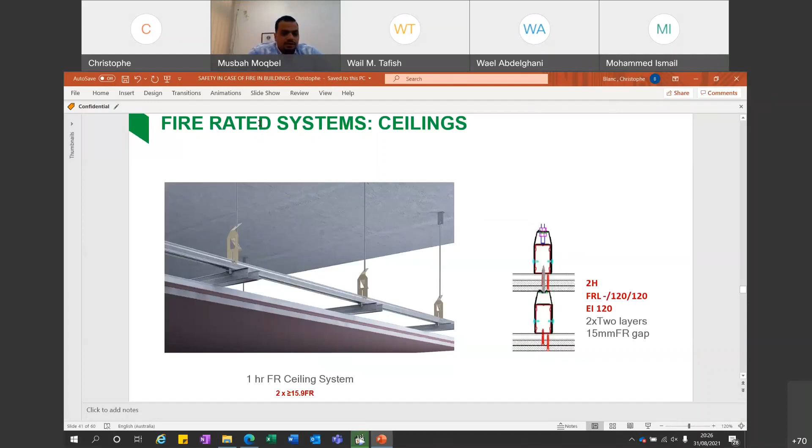Another very specific question, Christophe, and I'm happy with the quality and level of questions we have been asked so far. Yeah, that's very good, very high.

Is there any specific construction for the 2 hours fire-rated partitions that uses 2 layers of 12.5 fire-rated boards on each side? Is there any specific construction similar to the sealant, strips, perimeter, the assembly of boards, horizontal, vertical? Is there a special construction detail for the 2 hours fire-rated board assembly?

Yeah, it makes me think I could add one slide on this. We have seen that the double layer of 12.5 or thicker boards on the steel frame is ensuring 2-hour fire rating, and this can be either per ASTM, EN or BS, because we do have a business unit testing according to this. I've shared on the expansion of metal frame, but to accommodate structural moves, it's key that at the perimeter of the systems, there is a gap.

I'd say maybe a 10 millimeter, 1 centimeter gap that is fitted between the boards and, let's say, the concrete, either slabs or concrete columns. These joints have to be filled with a fire or fire acoustical sealant.

This will ensure the integrity and thermal insulation at the perimeter of the system, although it's not per se a weak point of the system. But leaving this gap, this flexible gap with a technical joint, will ensure that with regard to racking moves or structural moves of the building, when subjected to load or wind loads, there will not be any crack development. So the sealant at the perimeter of the system, for the gap left at the perimeter of our systems, filled with fire or fire acoustical sealant, is an important detail to keep in mind.

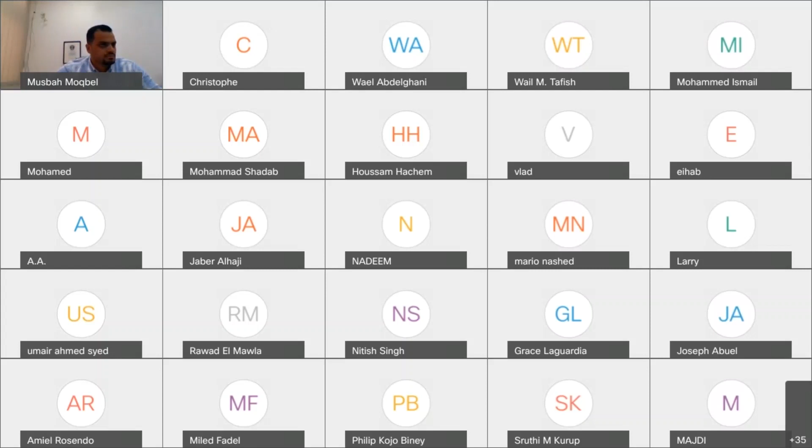Yes, that's a good question, because from what I've explained on the formulation of gypsums, with a content of around 20% combined water, standard board or regular boards, single layer, offer a little bit of fire resistance. I think I mentioned in one example that there is need of a minimum dry weight, but a 12.5 millimeter standard board, which weighs at least 8 kilo per square meter, so no fire additive, 12.5 millimeter, 8 kilo or more, each side of this would provide half an hour. It's not a lot, but it's a little bit something.

I have the document, but I don't know, I cannot share it. Yes, present, let me present, okay.

All information is available with our technical team, and it's accessible. The good thing is that we share these with our stakeholders as complimentary, free of charge services. So this is accessible, and we can share on request such technical information, and it's available, by the way, on Revit for BIM compatibility and CAD. This is an advancement which we offer as USG Middle East for our partners.

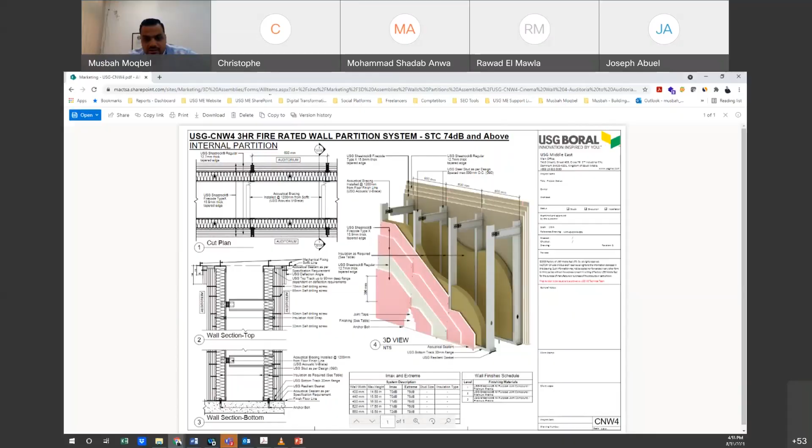How do we prevent mold mildew on gypsum board? This is something that has nothing to do with fire, but I can quickly answer. Mold can grow on everything, including glass and aluminum, but we do have mold-resistant board, mold stop or mold block. We do need to put an active additive into the core, kind of a biocide family, very, very small, that allows us to prevent and provide the mold resistance.